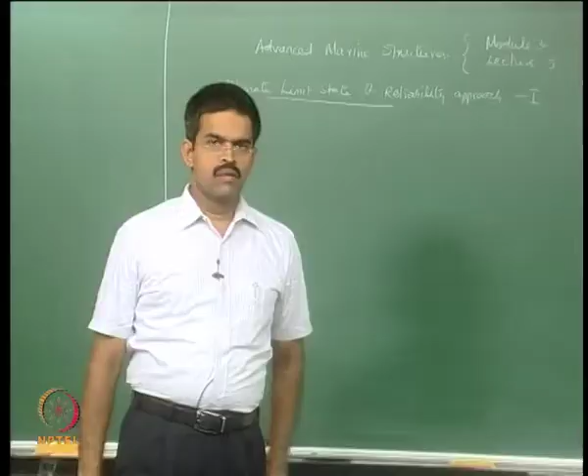In the last lecture we discussed acceptable level of risk. We said in marine structures or offshore structural engineering, essentially the risk cannot be zero, there is some accepted level which is formulated by international regulatory agencies like EPA, nuclear reaction power commissions, etc.

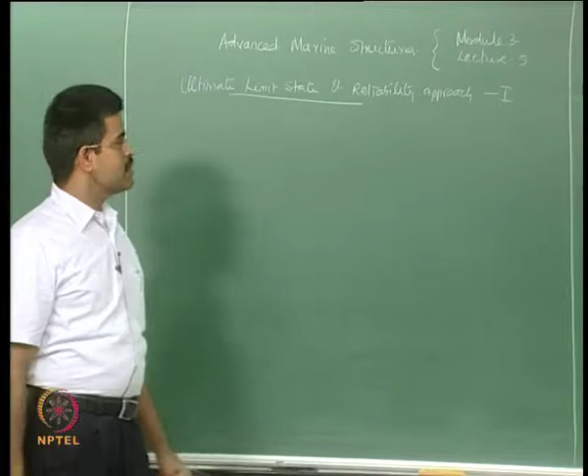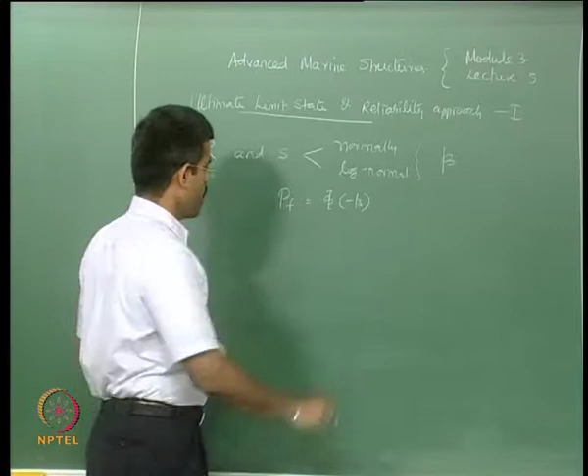There are international authorities which frame what would be the minimum acceptable level of risk based on which you can operate your platforms or marine structural systems. We have also said that if the resistance and the load effect, the variables, are normally distributed, or if they are log normal, then there are simple closed form expressions available to compute the reliability index. The probability of failure can simply be a function of reliability index, and there is a table we gave you in the last lecture based on which I can easily compute the probability of failure.

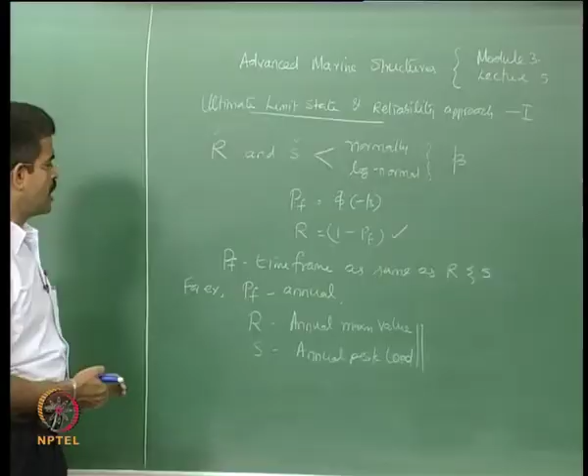The reliability can simply be set as 1 minus probability of failure, and there ends the solution for this problem if the resistance and load effects are distributed as per our notion, or the joint probability density functions can be evaluated in closed form. The emphasizing point here is that the probability of failure will be on the same time frame as that of your R and S. Suppose, for example, if probability of failure is annual, then R should be the annual mean value.

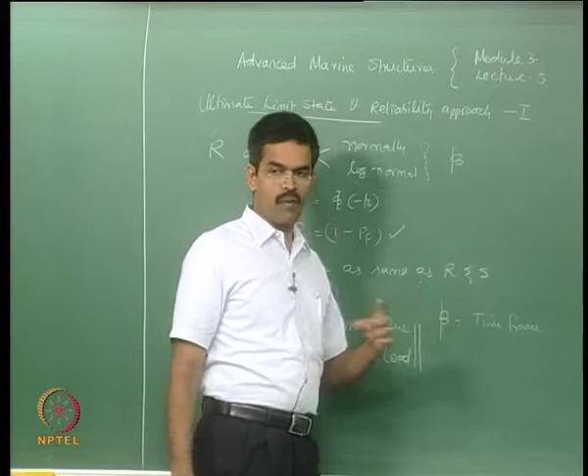And S should correspondingly be the load effect of annual peak load, and so on. So depending upon the period associated with the probability of failure you are looking at, the variables which govern the probability of failure will accordingly capture the same time frame. On the other hand, beta, the reliability index, has the same time frame as the variables R and S. That is what we concluded in the last lecture, and said the reliability index cannot be applied for an infinite time. There is a time frame within which you can apply the reliability index, because this is essentially depending on the time frame of R and S. We also said margin of safety M can simply be R minus S. If this is exactly zero, it is just on the verge of failure. If R is greater than S, it is safe. If R is less than S, it is unsafe or a failure mode. R is resistance and S is the load effects, that is why S stands for load effects.

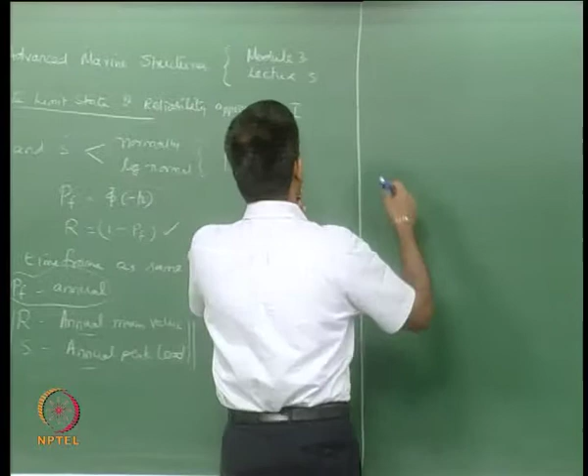Now we will see what would be the implicit failure probability which is applicable in the design.

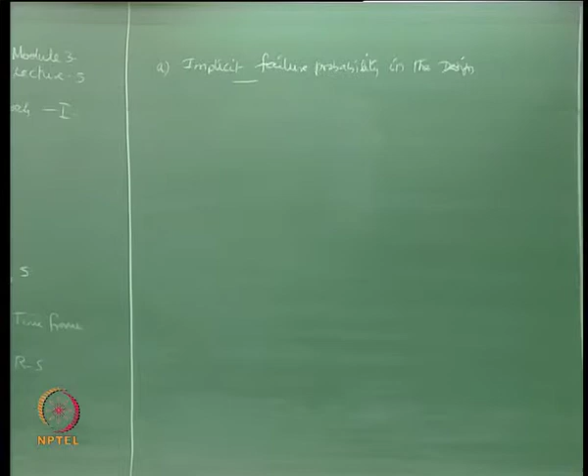We'd like to see there are two variables here: one is the resistance or strength of the material, and the other is the load effects coming on the material, the member, or the structure. Out of these two, the probability of failure or reliability is governed by which of these variables more seriously. We would like to look at that, and what would be the effect of this implicitly inbuilt failure phenomena which can significantly influence my design in probabilistic terms.

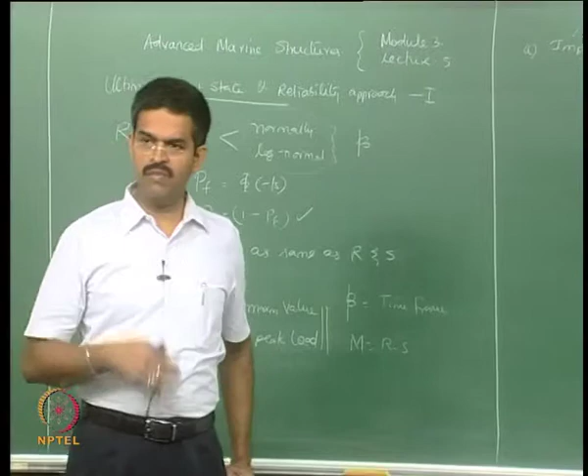That is what I am looking at in this topic. Let us see, through an example, how we can easily illustrate which of these two is more important. This doesn't mean the other is less important, both are variables, both have uncertainties which are irreversible or reversible. We have seen all of them in the last few lectures. All of them are equally important, but amongst these two, if one has to look at the superiority level, let's see how it's affecting the design.

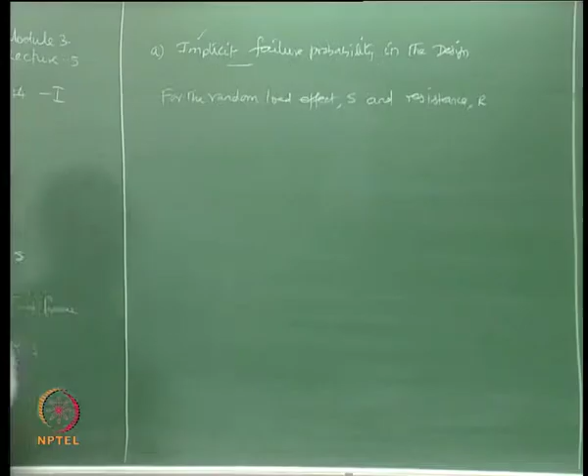For the random load effect S and resistance R, let them be represented as below, because we need the statistical characteristics of these variables. What are the statistical characteristics of these variables? Mean, standard deviation, and variance. Let us see that.

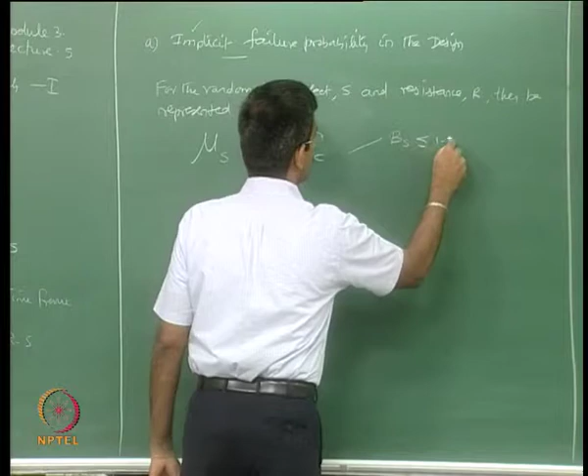Let us say mu s, that is for the load effect, which can be taken as Bs into, let's say, Sc, where in this case Bs is less than or equal to 1.0, and the variance lies between the value of 0.15 to 0.30.

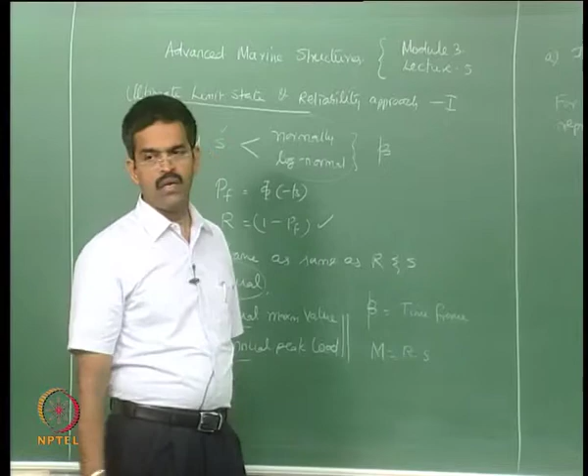Similarly, mu R, Br into Rc. In both these cases the subscript C stands for characteristic value. We understand what is the characteristic value of the strength and what is the characteristic value of the resistance. We already know this, we have defined it n number of times.

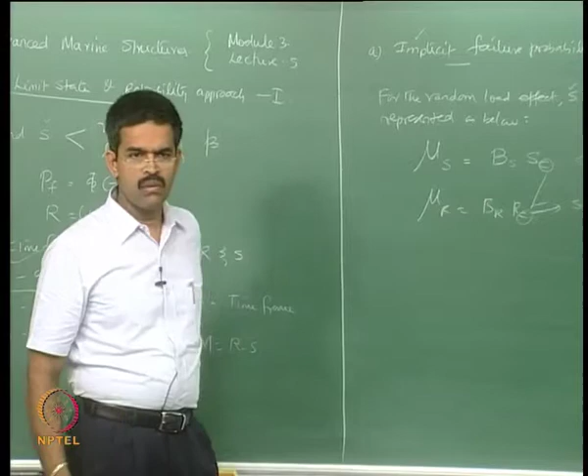So if these two are there, let us substitute this in my beta index problem and see what happens to my reliability index.

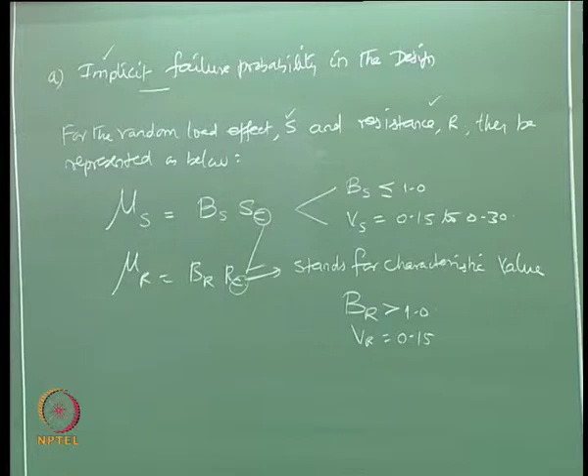Now specifically, Bs reflects the ratio of the mean load. Why mean load? Because I am looking at the mean of S. Suppose we are looking for an annual variation. If the period of variation is annual, then Bs should refer to the annual maximum value.

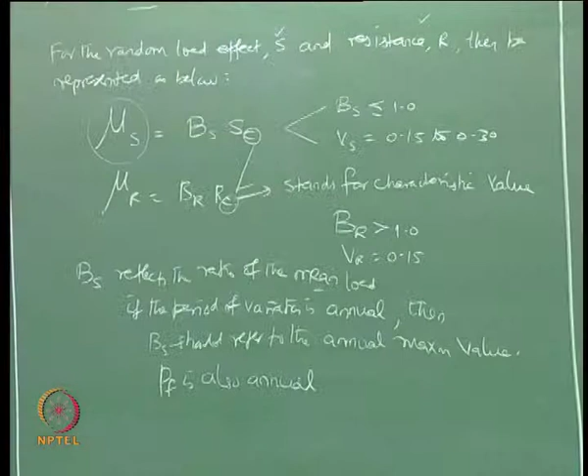Now, the characteristic values, as you see here, Sc refers to the characteristic value of the load effect, which is typically a 100-year return period, is it not? That is what we are looking at.

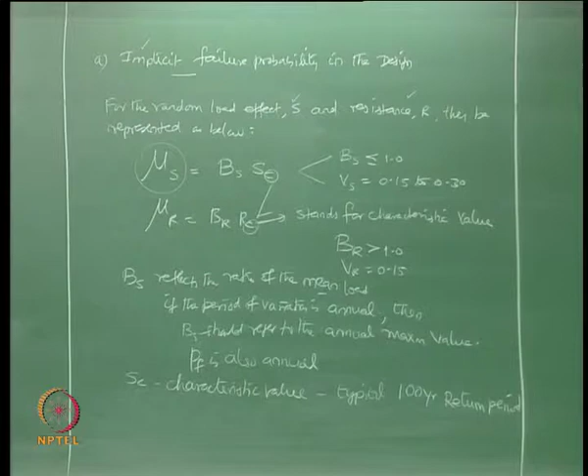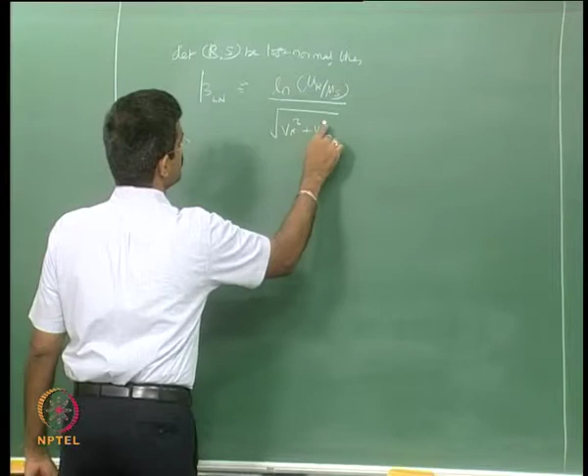Now let gamma R and gamma S, what are these? These are partial safety factors, okay, for resistance and for the load effects, be 1.5. That is a typical value what we have in most of the international codes.

Let us take Bs, it should be less than 1, I take this as 0.8. Let us take Br as 1.1 and we already know Vr is 0.15.

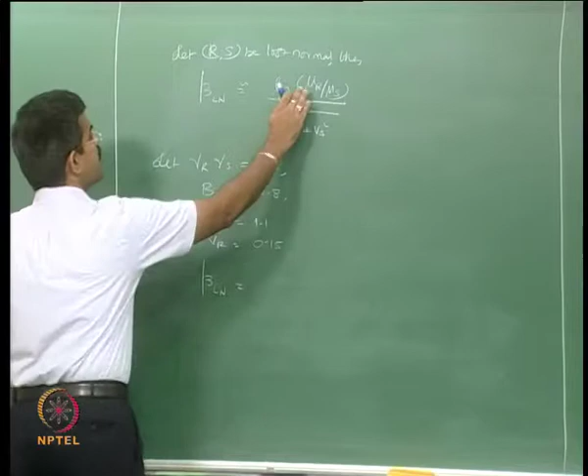We also have another expression which is derived from this by substituting for mu r, mu s and Vr, Vs, which can be ln of Br by Bs, gamma s, gamma r by square root of Vr square plus Vs square. This is also an approximate value.

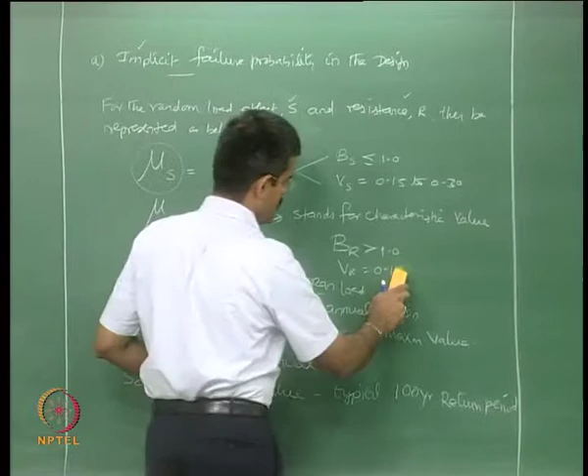Let us substitute this. So Br already I have as 1.1 by 0.8 multiplied by 1.5 divided by square root of... please make a correction here, Vr in this case is 0.1, not 0.15. So Vr is 0.10, so 0.10 square plus Vs square.

Now I have a band of Vs varying from 0.15 to 0.3. Let us say for Vs equals 0.25, my beta ln, can you find out this value? This comes to 2.7, and for Vs 0.2, that is in the same band, beta ln comes to 3.2.

So for a very small variation in the coefficient of variation of the load effects from 0.25 to 0.2, when Vs is decreasing, beta ln is increasing. So we can simply write...

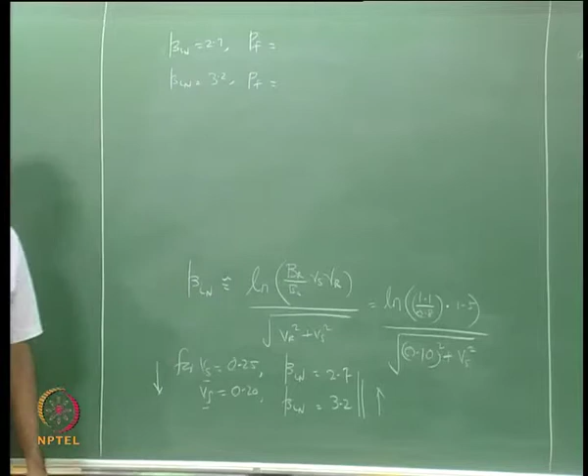So I can also use the table and tell me what are the corresponding probability of failure. For beta ln of 2.7, what is the probability of failure? For beta ln of 3.2, what is the probability of failure? 3.5 into 10 power minus 3, and for 3.2, let us say 7, 10 power minus 4.

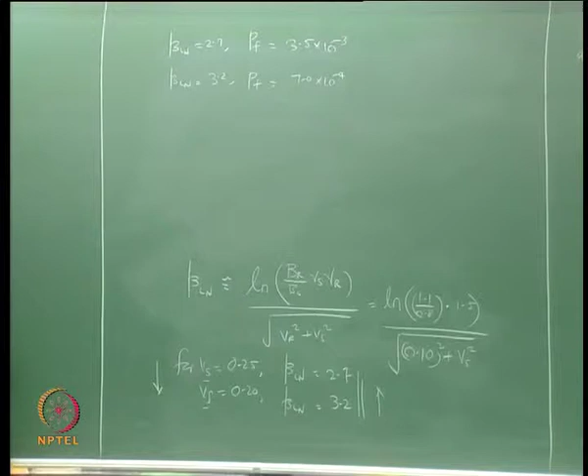Now we can see a very drastic difference in probability of failure for a very small variation of Vs. So what we can say is beta ln is inversely proportional to Vs.

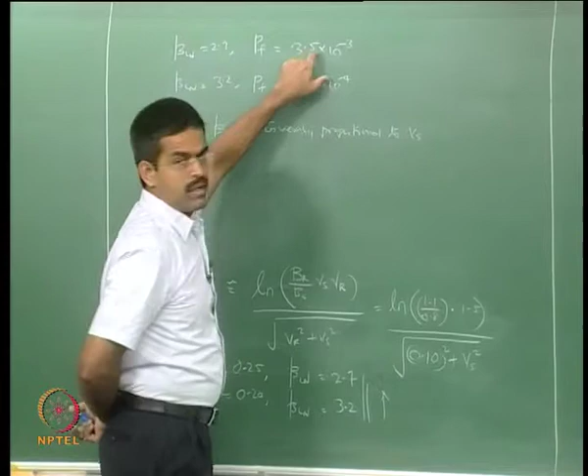So what does it mean? The variance of the load effects significantly influences the probability of failure and it is inversely proportional to beta ln. It is very interesting. It all depends upon how accurately you model the random variables in the load effects and find the parameters of mu, variance, etc. If you make any mistake or any data omission in calculating the first order second moment values, let us say mean, standard deviation, variance of the load effects, forget about the resistance, here we are fixing it, it can significantly give a very different sense of the meaning for your reliability or probability of failure. This is an implicit effect of the probability of failure in the design.

It is nothing but a statistical variable of the load effect which can affect my design sense very seriously, because it is very much different. Or even reliability index is very much different. It is a very important illustration through an example of how these parameters can sensitize the probability of failure in the design.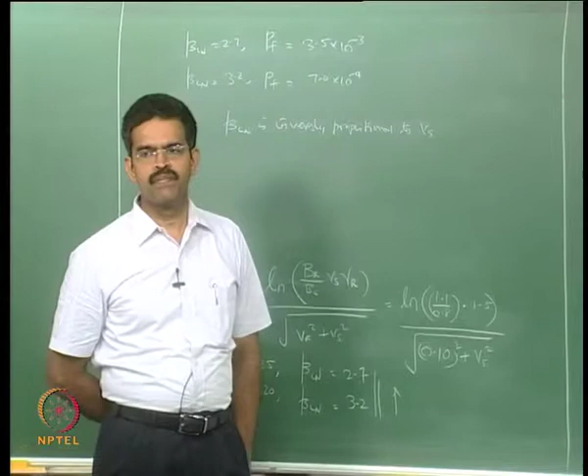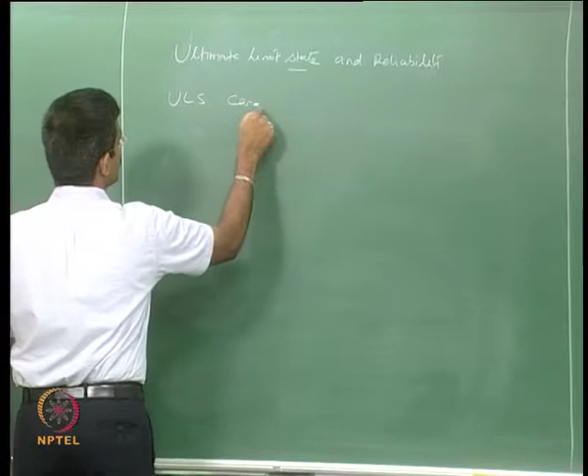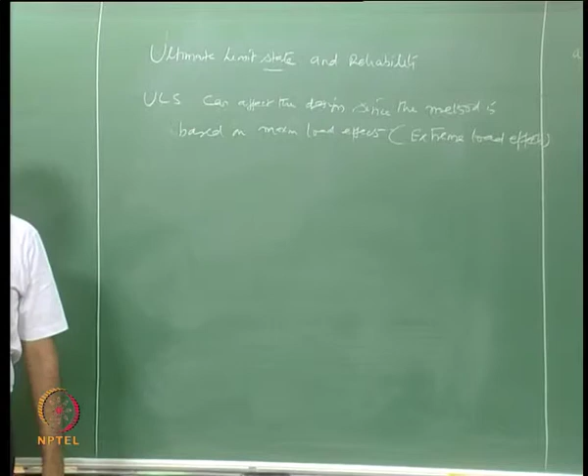Now, let us talk about how reliability framework can be useful in ultimate limit states. One can say the ultimate limit state and reliability, the ultimate limit state can affect or influence the design since the method is based on maximum loads, maximum load effects, or I can even call this as the extreme load effects. So, that is one statement, how ULS can be influenced by the load effects, because it is based on extreme load effects, that is why we call it collapse load.

Whereas ULS is also affected or influenced by the traditionally determined strength of material parameters like yield strength, Young's modulus, which are related to strength of the material or resistance factors.

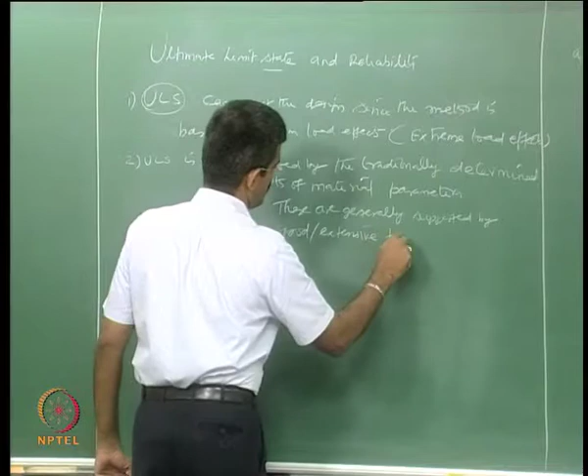Now, these are generally supported by good and extensive test results. Generally, you do not find the resistance parameters ad hoc, you conduct tests on different samples, take a proper mean. So, all these will have a specific implication on your ULS. That is why in this equation, if you see, generally the variance of the resistance is closely fixed, is not given a band.

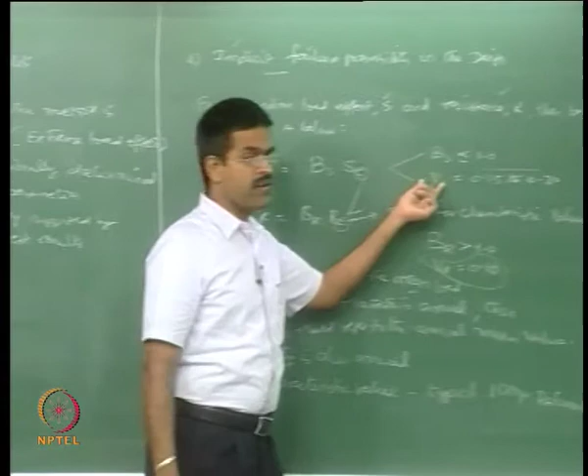Whereas the variance of the load effect is given a band, because there is a high degree of uncertainty in the load effects compared to that of the material strength, because material strength is calculated more or less in a very systematic manner with experiments in the laboratories. And there is an extensive quality control in manufacturing of this material, therefore there is not much variation, though there is a variance here.

We are not saying it is 100% right, but it is limited to a very narrow band of only 0.1. Whereas here, this has sensitized the beta ln, as we saw in the last example, by small variation of 0.25 to 0.2, beta ln and probability of failure indirectly are affected significantly. So, Vs or variance of load effects sensitizes the probability of failure significantly in comparison to that of the resistance or strength of the materials.

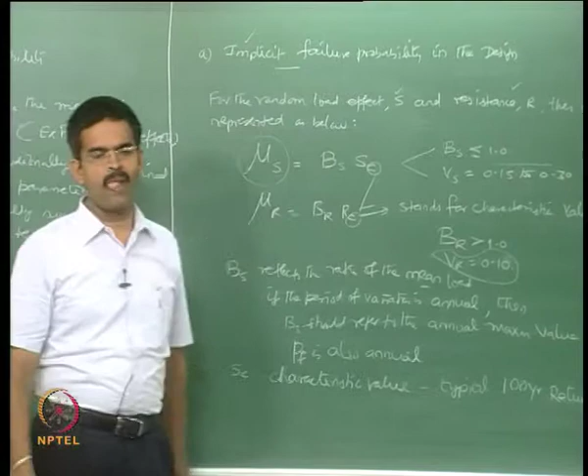So, one can clearly come to a conclusion saying that thank God to the manufacturing process and the quality control implemented by people, our variation uncertainties on the resistance factors of the material is far narrower compared to that of the load effects.

Now, one can ask a question, why can I not compromise or find out this to a higher accuracy? As I said, they are caused by randomness in nature, they are irreducible, I cannot control them. That is the reason why the variance in the load effects is higher. It is not because we do not have a mathematical process of narrowing down this variance, it is caused by the randomness in nature, which is unexpectedly or cannot be modeled correctly. It is because of this reason we say this has a larger band compared to that of the strength of material.

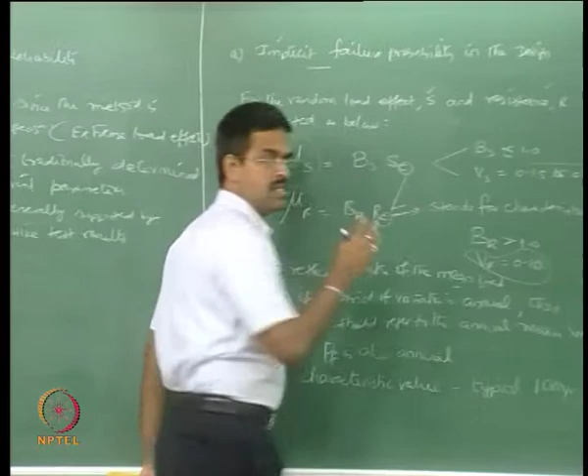Now, ULS is a design process which is affected by two factors. One is load effect; in this case we say ultimate limit state, we are talking about extreme loads. ULS is also bothered about the traditionally determined parameters. Now, let us look into these two and see how this can affect the reliability framework on ULS.

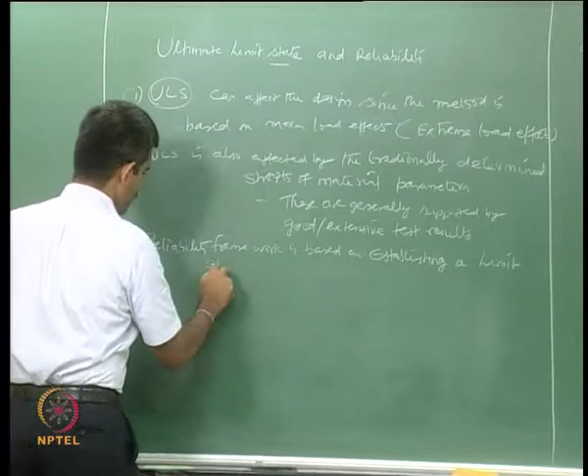Therefore, based on these two, the reliability framework is based on establishing a limit state function, that is what we have seen yesterday, which is G, is it not? That is what we have seen yesterday. This limit state function can be time invariant or time variant. That is what we saw in the last lecture, how y of t can cross the outcrossing of the limit boundary to find out the probability of failure.

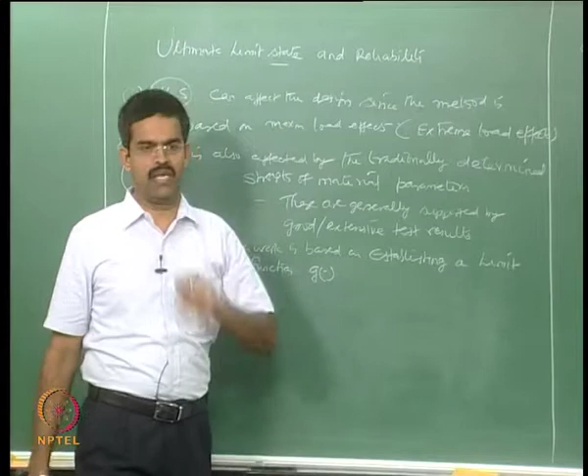We have seen two different curves in the last lecture, and we have found out how the limit state function can be established. Essentially, reliability is establishing the probability of exceedance of limit state boundaries. You form a boundary and look at the probability that this boundary will be outcrossed. Outcrossing means failure, not crossing means safe. Reliability is not 100% accurate, only because establishing the limit state function itself is a difficult task, and determining the joint probability density function or integrating this over the domain of the limit boundary is complex, which we have seen in the last lecture.

Having said this, let us now take a single value of R and S and see how this affects my ULS. Then we will take multiple values of R and S.

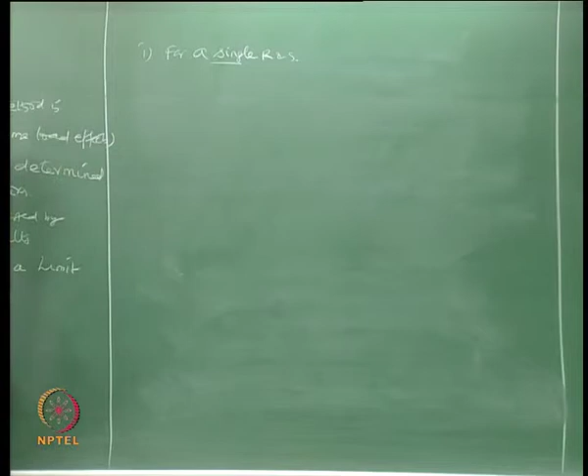Let us say for a single R and S, that is resistance and load effects, the limit state function is given by G of R and S, which can simply be R minus S. Call this equation number 1.

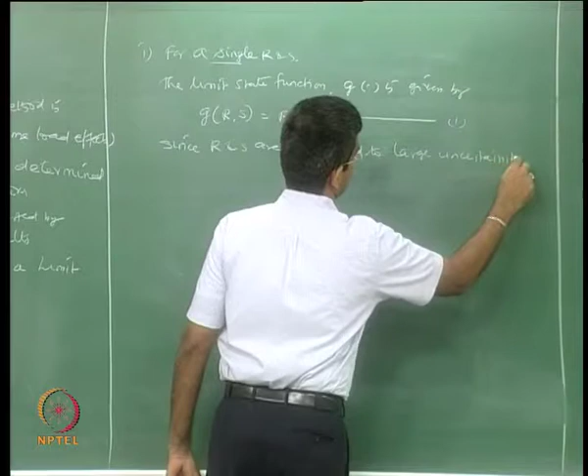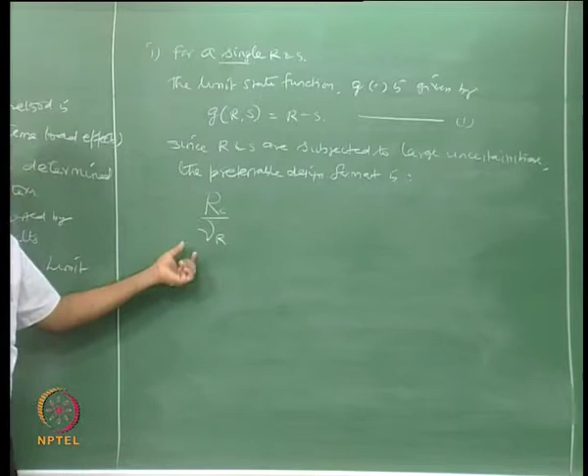Now, we already know that since R and S are subjected to large uncertainties, the preferable design format is simply using a safety factor on this, which is what we have done in design. So, we should say the characteristic strength of the material by gamma R, that is the safety factor of the material, should be higher than or greater than the safety factors used for load 1C plus safety factors used for load 2C. This C stands for the characteristic value, and there can be 2 loads or 3 loads like this. Gamma S1, gamma S2 are respective factors for different kinds of loads, because as we all understand, given in API, given in ABS, the load safety factors are not the same for all kinds of loads. Somewhere it is 0.95, somewhere it is 0.9, and so on.

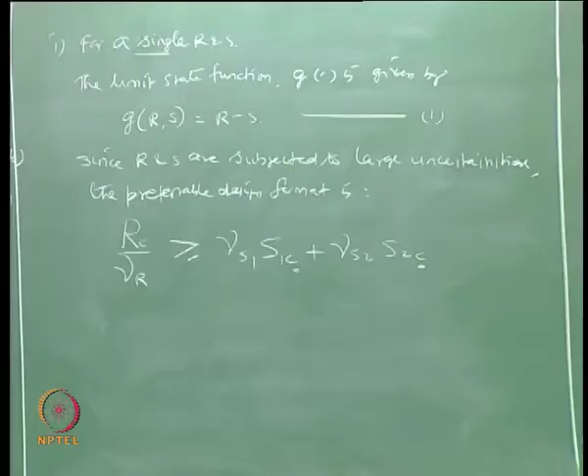I call this equation number 2. In this equation, the subscript C stands for characteristic values, R stands for resistance, and S stands for load effects. Nu R is the resistance factor, and nu S1 and nu S2 are the load factors.

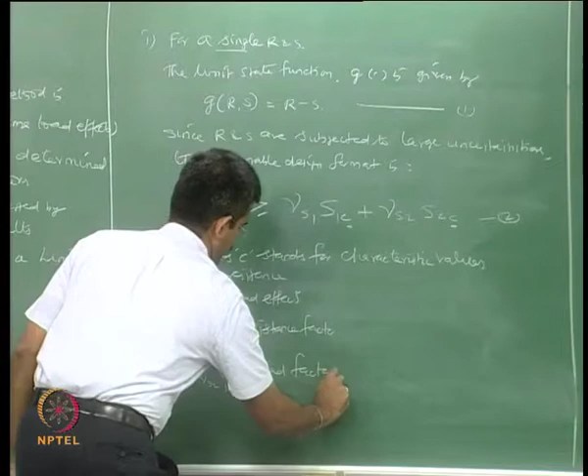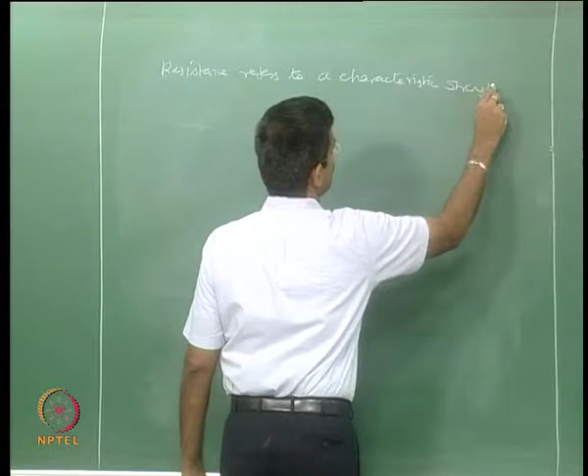Having said this, we also know that resistance refers to a characteristic strength of 5% fractile material strength. The variation in the material strength is only within 5%; 95% does not vary.

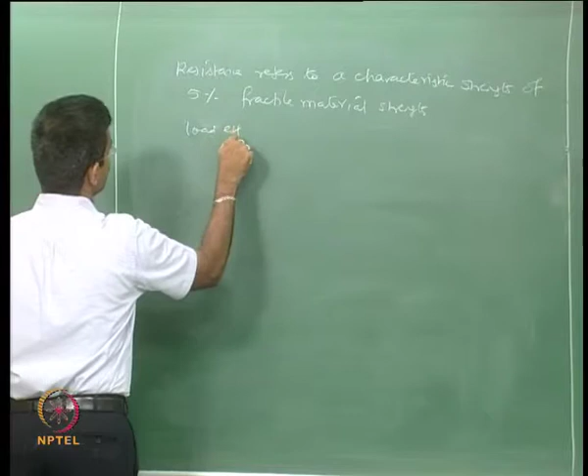Whereas the load effects refer to an annual probability of exceedance of 10 power minus 2. I think this we had discussed in the first module, if you remember. It is understood that the characteristic value of load means that the probability of exceedance is 1 in 100. That is what it means for the characteristic strength of load.

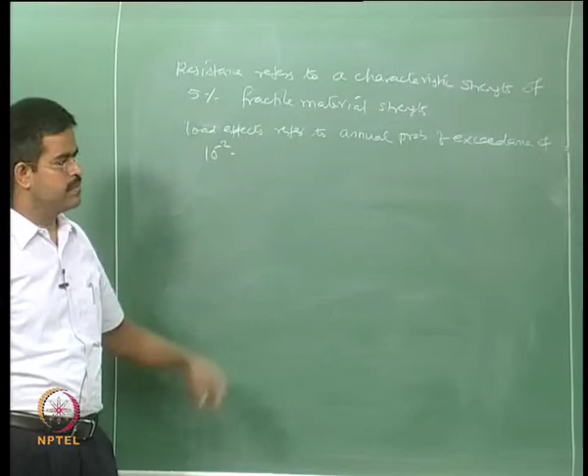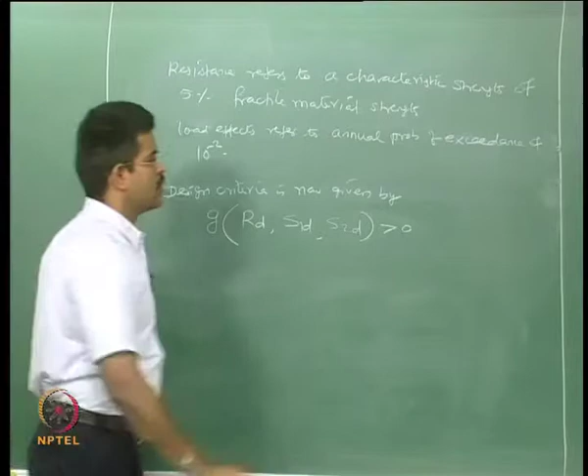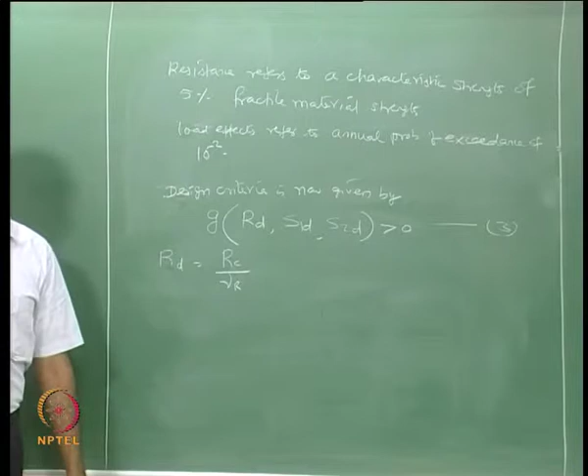Now, the design criteria is given by the limit function of RD, S1D, S2D, which should be greater than 0 for a successful design - call this equation 3, where the subscript D stands for design. We can also say RD is RC by gamma R, that is my design value, which is how I take it in the design. And S1D can be S1C times gamma 1C, S2D can be S2C times gamma 2C - these are all called design values.

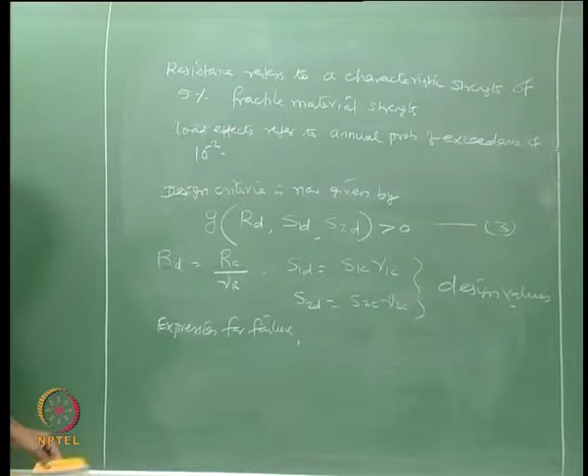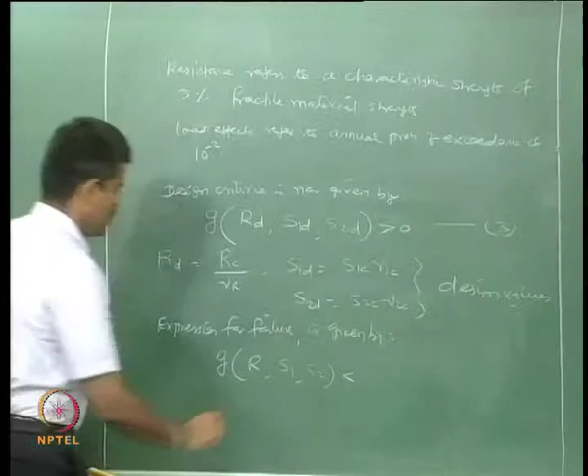Now, the expression for failure is given by G of R less than or equal to 0. Even if it is equal to 0, it is said to have failed because it is on the verge of failing. R minus S is the margin of safety. If it is set to 0, it is failed, it is on the boundary. If R is greater than S it is safe, if R is less than S it is unsafe. That is why we say less than or equal to 0 is my limit function.

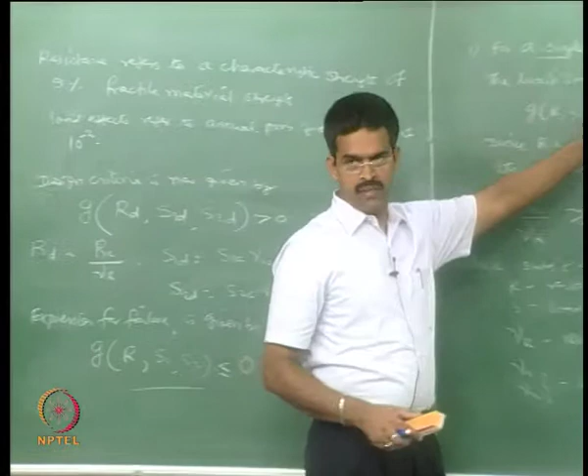This is for a single value of R and S, where we can easily find this out. Now, if you have got multiple R and S, then how do you go about it?

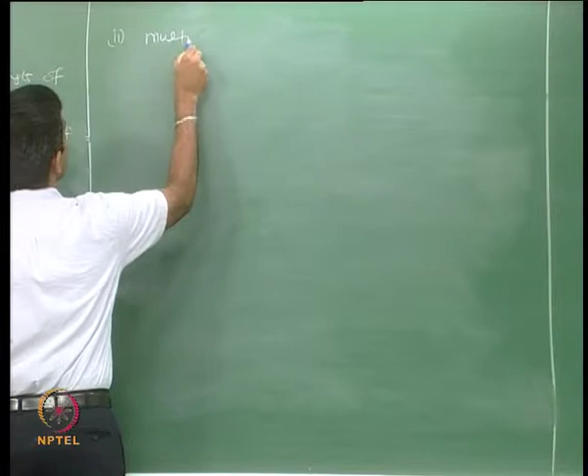What do you mean by multiple R and S? The structure can be subjected to different load combinations. For example, there can be an effect of axial load, maybe tension or compression, and bending. So, it is a multiple loading effect.

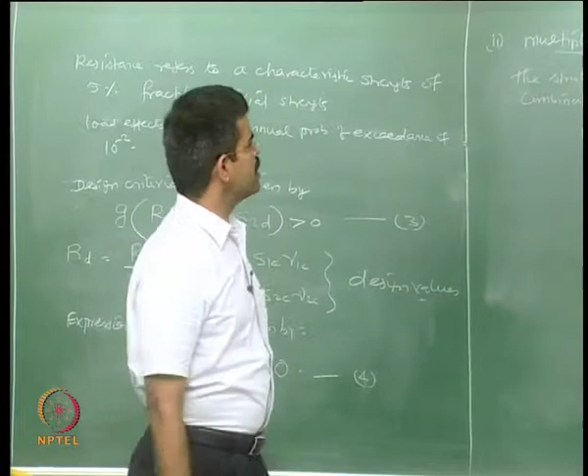Multiple R and S means it is not that there are different varieties of loads, that is already there in the previous case also, S1, S2, S3 etc. But we are looking now at the combined effect of these forces or effects on the member, that is what we call as multiple.

What do you understand by multiple R? I have got a composite section. The strength of the material can vary between the two sections composed together to form a single unique material, where we already said functionally graded materials. It can have a multiple R problem also, depending upon what I am going to recommend for my design. So, that is the meaning of multiple R and S.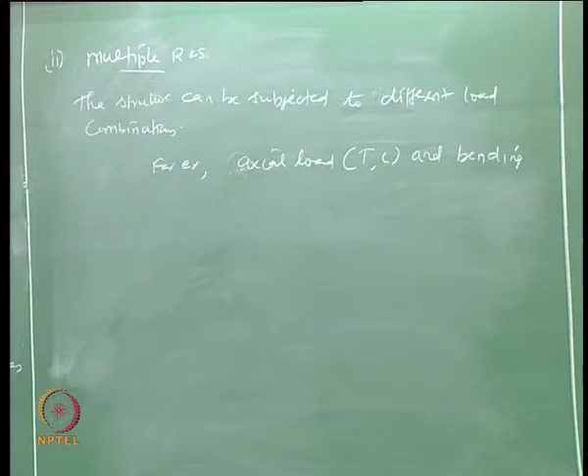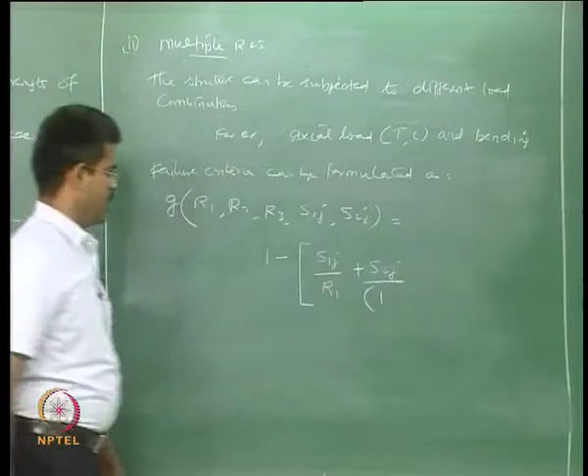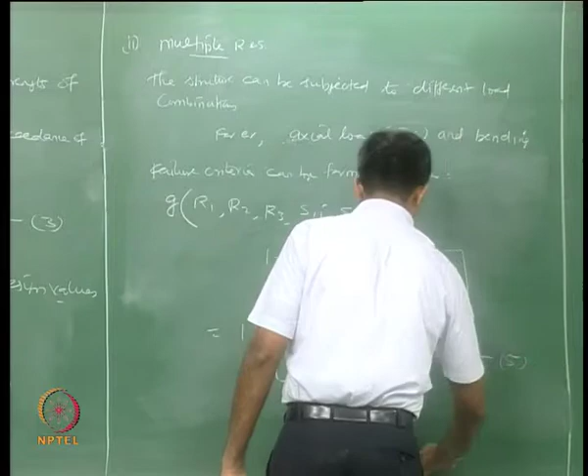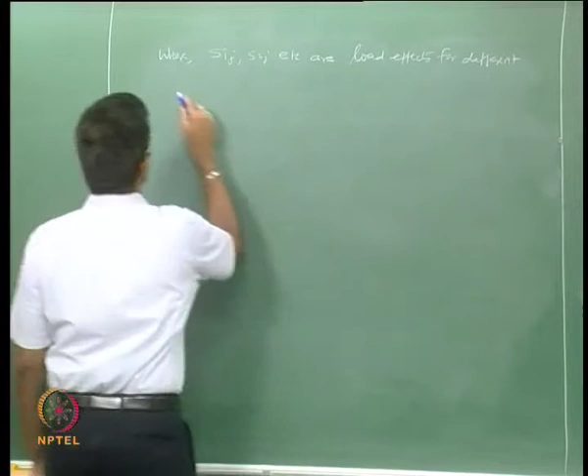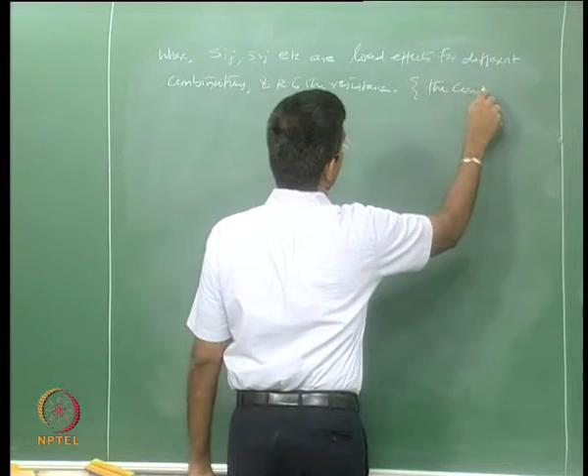Where S1j, S2j etc. are load effects for different combinations, and R is the resistance. Essentially, the count J stands for different load type.

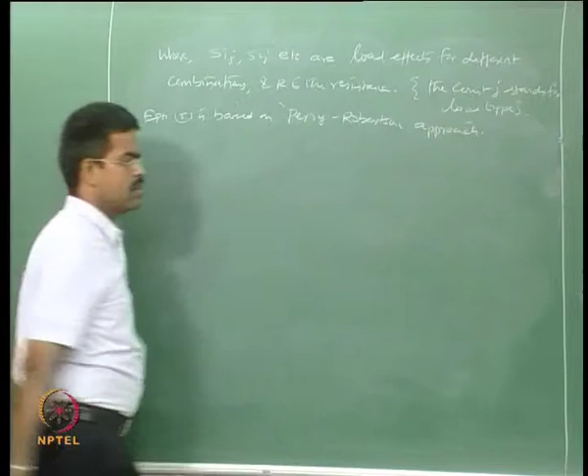Now, equation 5 is based on the Perry-Robertson approach. That is a very famous approach in reliability analysis.

Whereas, in which R1, R2 be the axial force and R3 be the bending moment - sorry, the Euler load. Axial force, okay, and bending moment capacity together, and R3 be the Euler load.

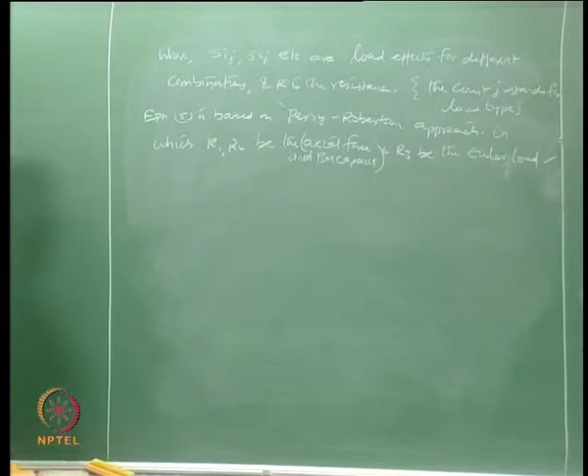Now, in the practical design, R and S are used by means of their respective characteristic values. Whereas, in reliability, they are considered as random variables. That is how they are differentiated in the ULS and the reliability framework.

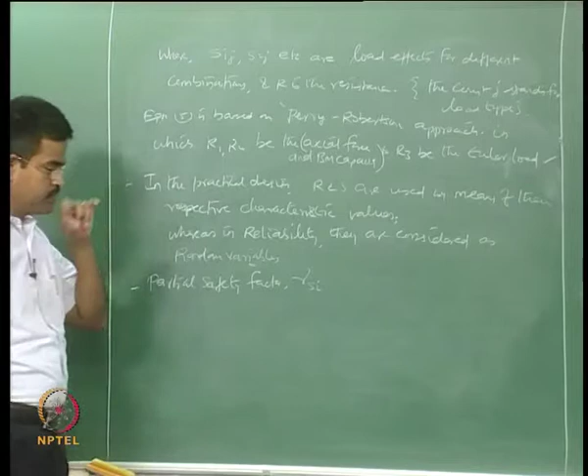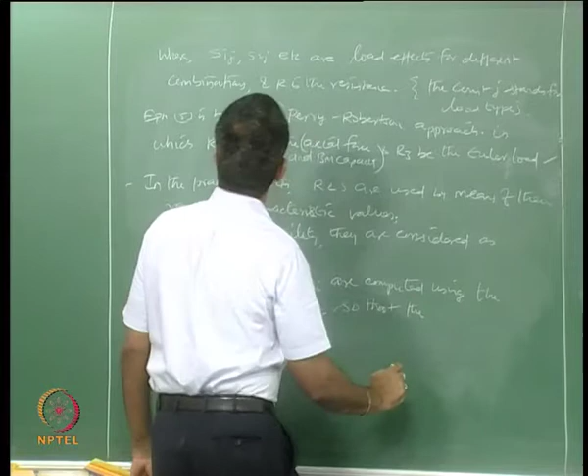Now, the partial safety factors, that is gamma Si 1, 2 etc. for different loads, are computed using the structural reliability theory so that the design equation - what was the design equation we gave in the last one, single R and S? I think we said the design equation will be R by safety factor and S multiplied by the safety factors, S into equation number 3.

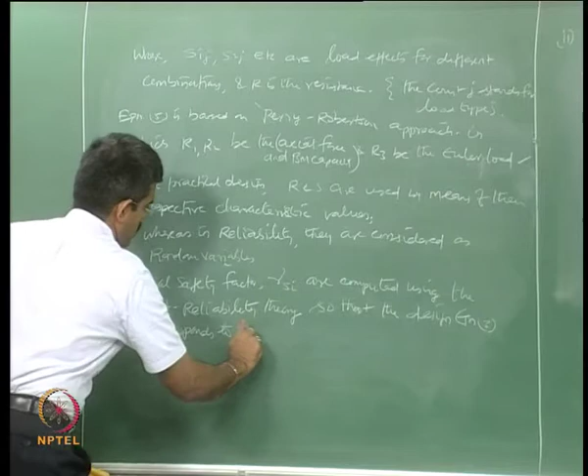That is the design equation given in equation 2 corresponds to the target failure probability.

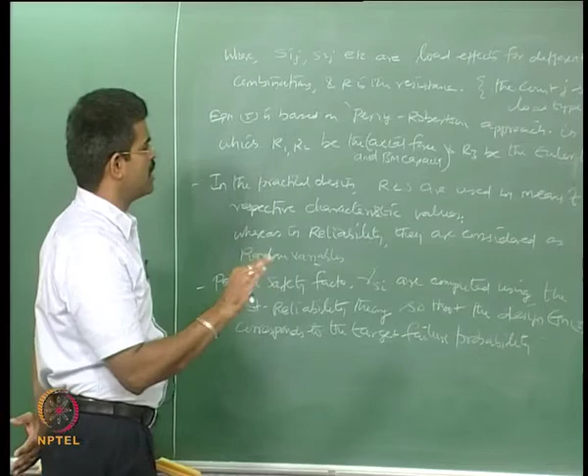So, this is a variation what we use in case of multiple R and S compared to that of single R and S. So, there is a one-to-one correspondence between ULS, that is ultimate limit state design methodology, and that of reliability. First correspondence between these two, or similarity, is in design applications we consider them using characteristic values, whereas if we really want to consider them in reliability problem to find the probability of failure, we consider them as random variables. So, to amalgamate or to mix up or to have influence on one over the other, what people have done is...

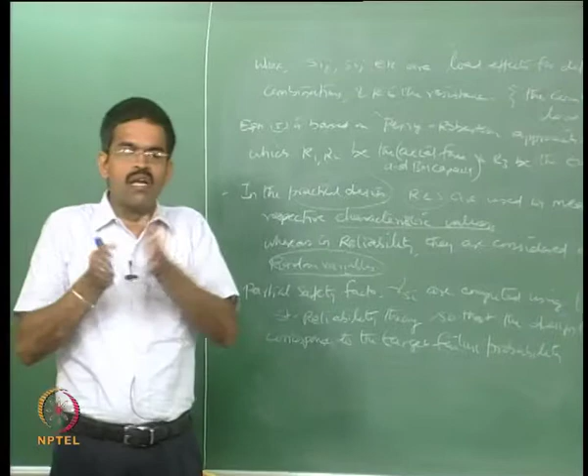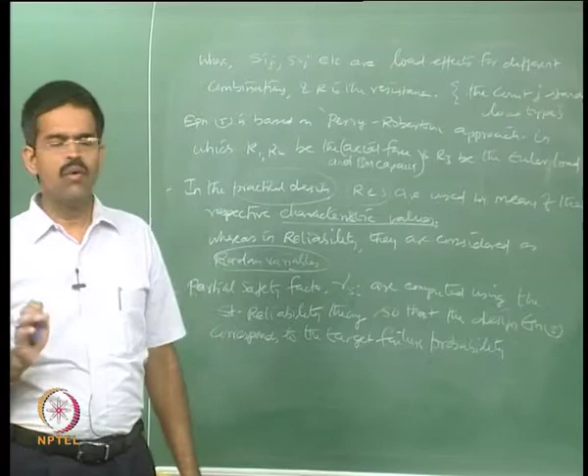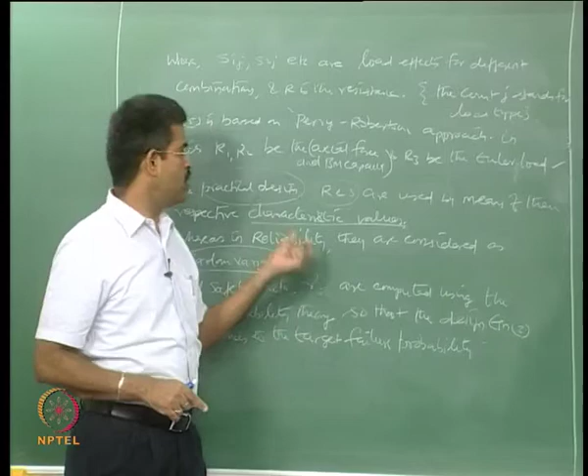So, one should have a rational way of estimating these safety factors using reliability theory, where the parameters contributing to this, that is R and S, are considered as random variables. Once it is obtained, use it in the design as characteristic values and do the design. So, it means that the design used by calculating or employing these values will have a defined probability of failure which you already know, 10 power minus 3, 10 power minus 4. 1 in 10,000 structures may fail, that is the probability of failure if you use this gamma SI in your design. You understand, this is how they are arrived. Is it clear? That is how ULS and reliability theory are bridged.